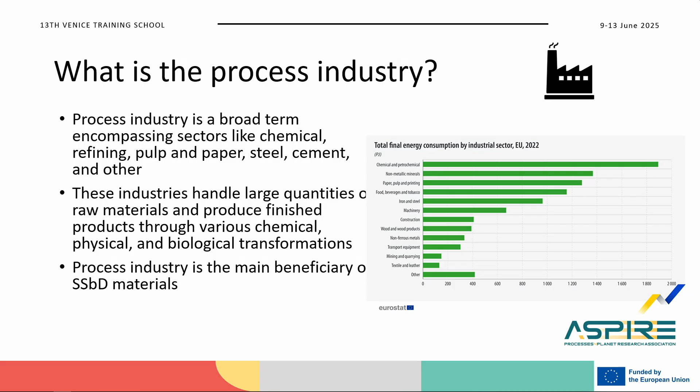Indeed, process industry is by far the greatest consumer of energy and materials in the world. But from the other point of view, it's probably your main customer as material designers. If one day your great substances or materials end up being commercialized, they are going to be the ones that will upscale them and really make money out of it.

So let's talk about safety and sustainability. Remember that SSbD is a framework not only for materials and substances, it's also for products and processes, and it's something where everything can work together. If we have a look at this diagram, we will see that process industry is somehow involved in the area of step number 2, safety in the operational environment, sustainability, and finally the socio-economical assessment.

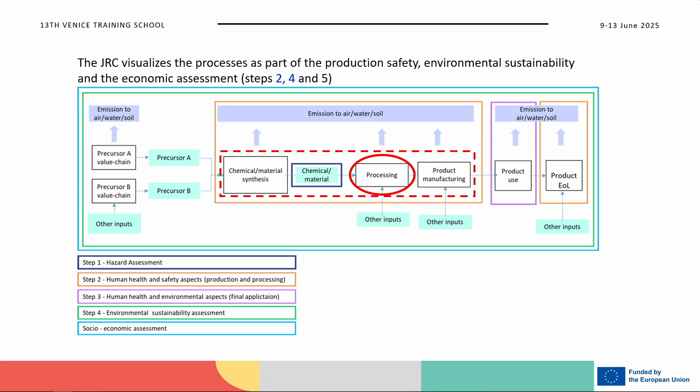Today, I'm going to talk especially about steps number 2 and number 4. So, step number 2, safety. I brought here 4 examples about how process industry can improve the safety of the materials or the substances we want to elaborate without changing their chemical composition. I did it intentionally. So let's start with the first example.

Let's talk about the material format. I'm not sure whether you've ever been working with additive manufacturing, but something you should know is that if you work with aluminum powder as raw material, it's an explosive material. At this point, we could directly start trying to redesign the material looking for non-explosive properties, but it's much easier than that. I told you that aluminum powder is explosive. We can just change the format of the material and work as wire. That's called wire additive manufacturing, and it's not risky at all.

Another example, probably in the same line, is whenever our process needs secondary substances that are not intrinsically part of the material itself, like lubricants or solvents. In those situations, again, it's not about substituting those lubricants or solvents, we should somehow go deeper in the process. I was quite surprised a couple of days ago when we were in that group for lubricants, and Iranzu was the first one who said, do we really need those lubricants or those solvents? That's the right question we should ask ourselves, because sometimes we can drastically modify the process in a way that we don't need them anymore.

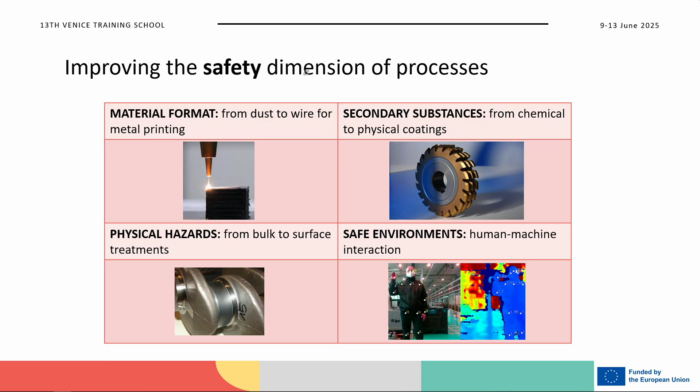And last but not least, there will always be situations where that hazard is very difficult to remove because it's something inherent to the material or the process. Then we can always change the working environment. During the last few years, machine-human interaction has been gaining the attention of research. The idea is to convert sensors or cameras into processing machinery in a way that they can detect the presence of humans in the surrounding area. If the machine considers that someone is very close to the risky area, it will automatically stop.

And that's just about redesigning the processes to be safer. We will for sure need data, and for that purpose, I've got good news: in process industry, we have access to a huge amount of theoretical and real data.

On the one hand, we have very good analytic models like finite elements to simulate how the new processes will behave, how much material they will need, how much energy we will need to input. We can also simulate very well the way that risk propagates in the company—I'm talking about radiation or heat. If we are still working with toxic substances, we still have obviously the QSAR models.

And something I wanted to highlight: process industry usually works with digital twins. This is a huge source of real-time information—I'm talking about material consumption, material flows, energy flows, even people working around the machinery. But that's a dragon. As Irina was saying yesterday, it's quite difficult to get access to that digital twin of the company. So don't be a dragon, share your data.

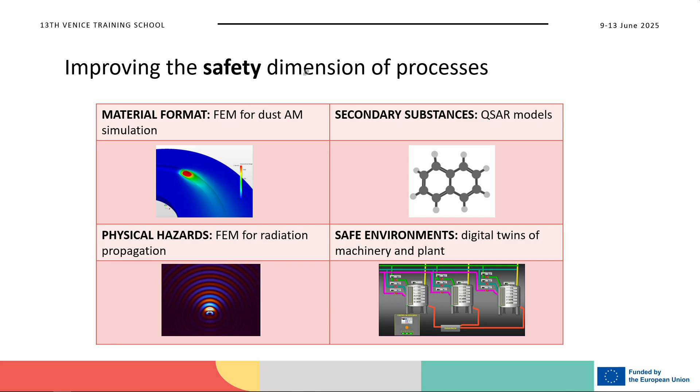Right, let's move to the next step: sustainability in process industry. In the case of processes, the strategy for sustainability is quite clearly defined. There are about 7 or 6 spots where the industry is currently working.

I'm going to start mentioning the first two. They are quite similar: material and energy efficiency. The idea is almost the same—save as much material and as much energy as you can. Currently, the main solution seems to be in the area of digitalization. It's a word I don't really like to use because it's so broad that it can be confusing. But in this case, it's just about monitoring all the material and energy consumption we are having in our company and detecting those areas where we are really wasting energy and material. In many cases, it's just about switching off the machines where they are not being used.

Another trending topic in process safety is to change the main source of energy. We still have a lot of industrial companies nowadays using fossil fuels for their processes—I'm talking generally about thermal processes like casting. I'll be honest, it's quite difficult to convince them to change that because it's somehow the heart of the company. But there are alternatives: there are always green alternatives like green hydrogen, biofuels, or even thinking about whether we can move from burning things to electrifying the process in a way that we can get access to renewable energy.

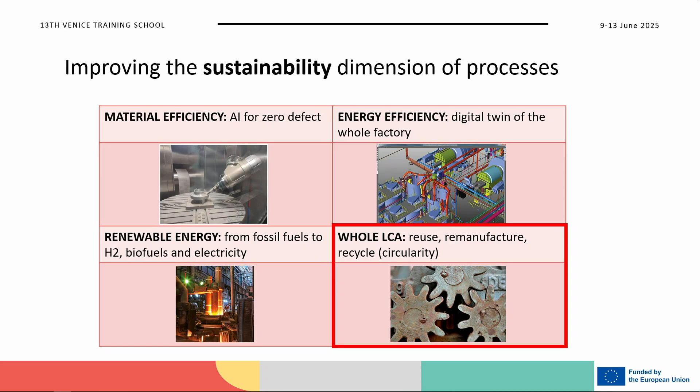And I wanted to stop for a while on this last slide because it's actually the bridge between processing and functionality. I brought this simple example, but I think it's quite significant.

So what's the matter? If we start designing a new material with extremely high durability, we will notice that things are never for free. Hard materials usually need a higher amount of energy during production. And indeed it's even worse: once we produce that hard material, it's going to be quite difficult to manufacture a part out of it, because no one can drill it, no one can bend it. It's a very difficult material to work with.

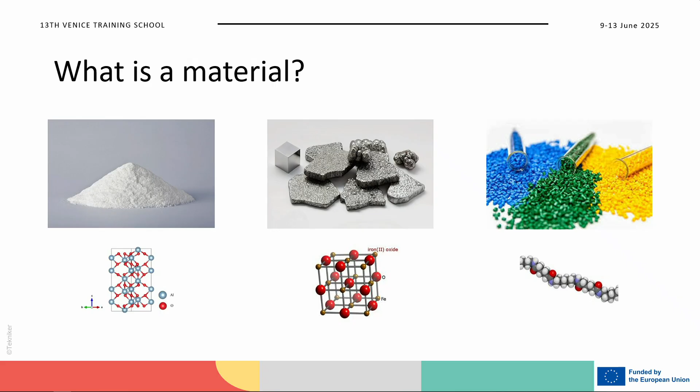So I will start just with the basics. And I know that there will be people that will not agree with this first concept of material. So what is a material? If we talk about an ideal material, we will say that it is a substance made by atoms combined together under a certain structure. So the way that they are combined can give some specific properties.

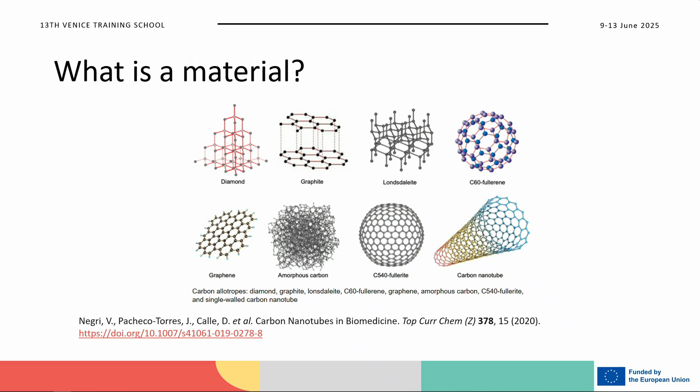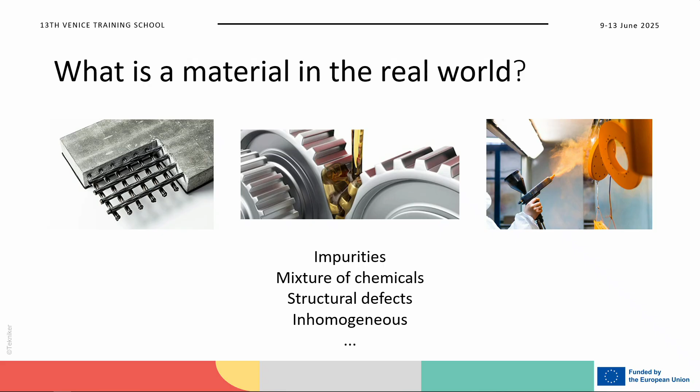Well, this is very good for modeling because it's quite simple to model, but in reality, a material is composed by many other components. So we have a lot of chemicals that are involved. There are structural defects that are not considered in the ideal world. There are parts that are not homogeneous, and a lot of impurities. So, well, let's say that the world sometimes is more complicated.

So we need to have an idea of how to create these materials. We know that there are some characteristics that can help give specific properties. There are some microscopical level parameters that we can play with to give a specific functionality. We can also play with the composition, adding some alloys, for example. This is the case of the metals. Most of the metals are composed by different alloys that are mixed, or additives, like in many chemical products.

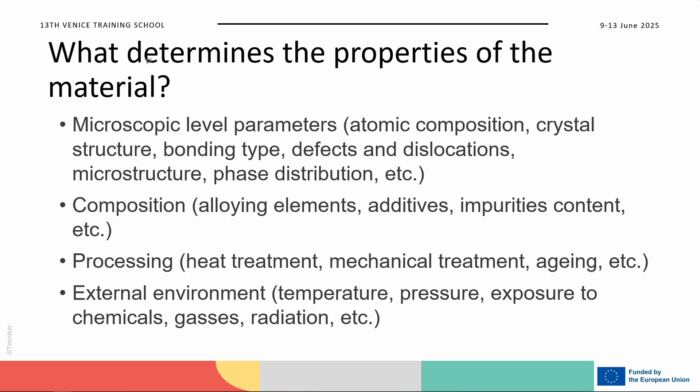We can also confer some properties by processing the materials. So we can harden the materials with heat treatments. We can also use mechanical treatments to confer specific properties. And then there is also the environment that can give defined properties to the material.

So, well, how does this look like when we are talking about functionality? So when we have a material, we have to consider that the functionality of this material is the ability that the material has to behave in a certain way in a specific environment, and for a specific application. So a material can have a lot of properties, but it doesn't mean that this is a function of the material. Because, for example, a jacket can have some specific optical properties, but if I don't need them, it's not part of its functionality.

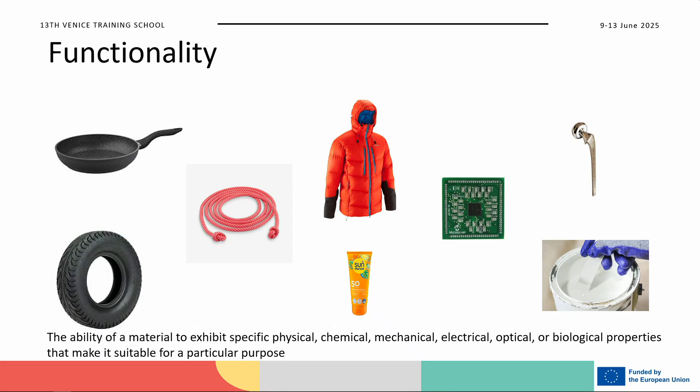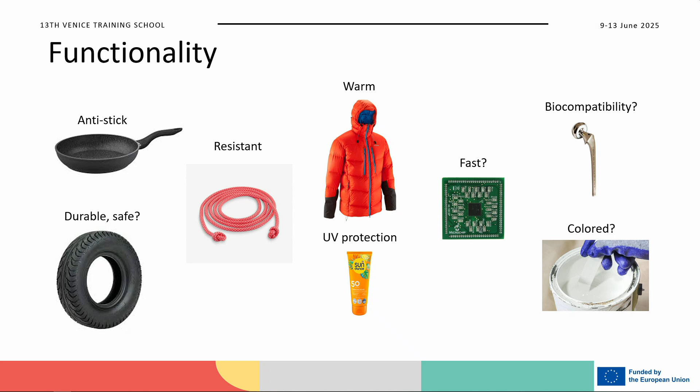So when we see a determined material, we associate to this the properties that we want normally. So, for example, we want that a jacket will be warm, or for a sunscreen to have UV protection. But in general, there are not just the properties that come to our mind immediately; there are other properties that we have to consider, because it's not just one of the properties that makes the material functional, but it's a combination of them.

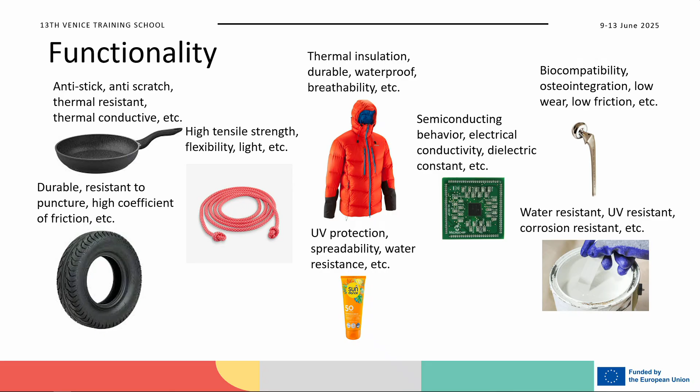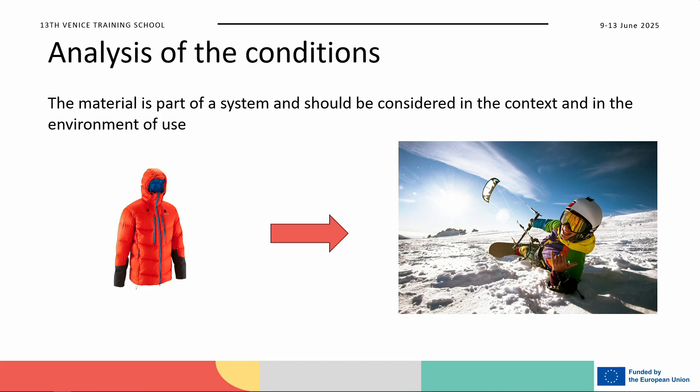So, a very important point is to consider the conditions that we have to test. If we want to characterize a material, we have to put it in a specific context, and we determine conditions, because otherwise we can assess the wrong parameters, and so we are giving a functionality that it doesn't have.

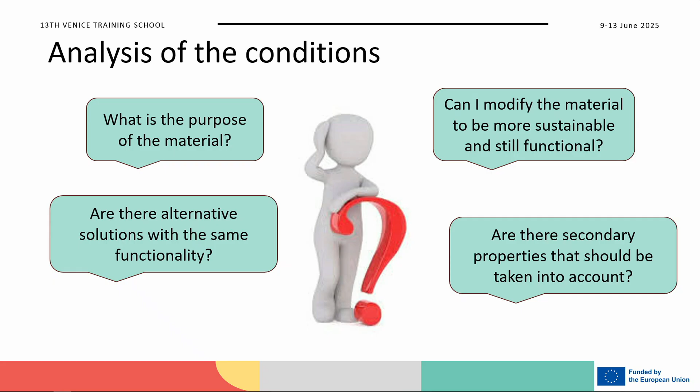Two days ago, we were talking with some of you about the use case of lubricants, and I realized that there were some aspects that I didn't touch in my presentation, so I've added just one part. When we are thinking of a material, we have to think about the purpose that has to be satisfied. Are we able to modify the material itself, or is it better to find a different kind of approach, a different kind of solution? Are we considering all the properties of the material in the right way?

So I went back to the use case that I had proposed. This is the use case of lubricants for the deep drawing process. Some of you didn't know this process, so it's like a punch that presses against a sheet of metal and gives a determined shape to the sheet so that it has a functionality. In this case, it's a basin sink. What we expect from the lubricant in this process is to reduce the friction and to mitigate the wear, specifically because, since metal is sliding against metal, there is a lot of heat produced, and so we need these properties from the lubricant to make the process easier.

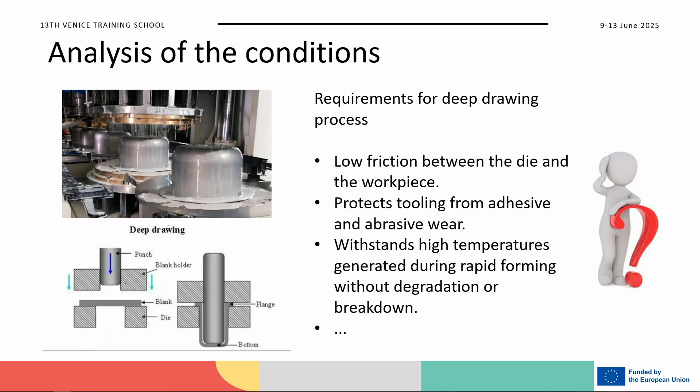Our problem is that at the moment there are chlorinated paraffins, an additive for the lubricants, that are extremely toxic. So we want to substitute them. What is the functionality that they give to the lubricant? They are anti-wear and extreme pressure additives. They reduce the friction, so we can keep this in mind to find a solution for the substitution. They are also quite thermally stable, so these are the properties that we want from the lubricant, because we have to substitute them.

So we can think about the new solution. Should we just exchange the chlorinated paraffins with another additive? Should we make a completely new formulation? Or is it possible to have a new process? For example, a coating. It's a good solution, in many cases it's used. So we could also think about this.

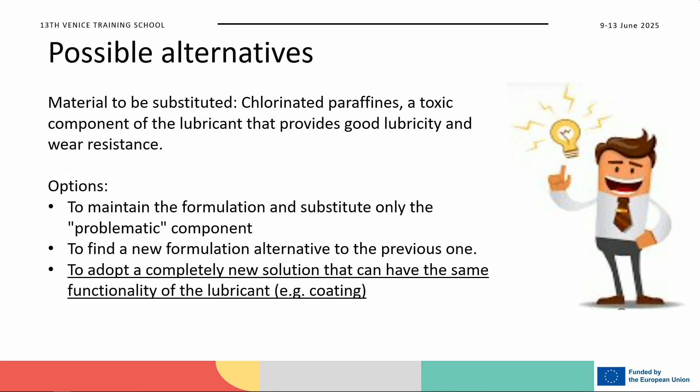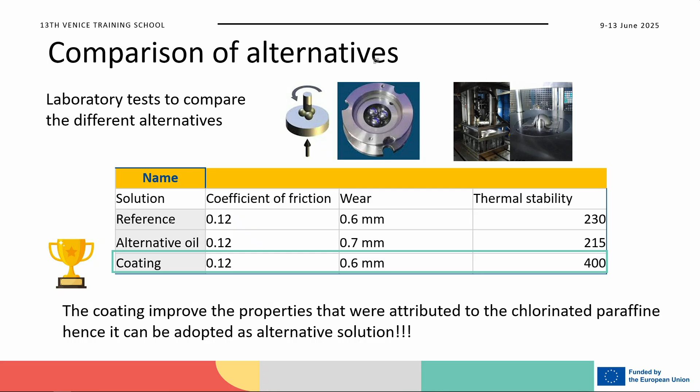We can go to the laboratory and start to test the lubricant and the coatings and see that we have good properties from the side of the coating. It has a good coefficient of friction. The wear is low. It's much more stable from the thermal point of view. So it's a very good solution. We can test with laboratory tests, we scale it up, and it works. But then we go to apply this solution, and it will fail.

Why? Because we haven't considered all the parameters from the side of the lubricant itself, because the lubricant also has to dissipate heat. It's not that it just has to be resistant to heat. It also has to mitigate this heat and remove it from the component. Otherwise, we are accumulating heat inside of the die, and at a certain point, it will generate a failure on the pieces that we are producing, and also a failure of the die itself.

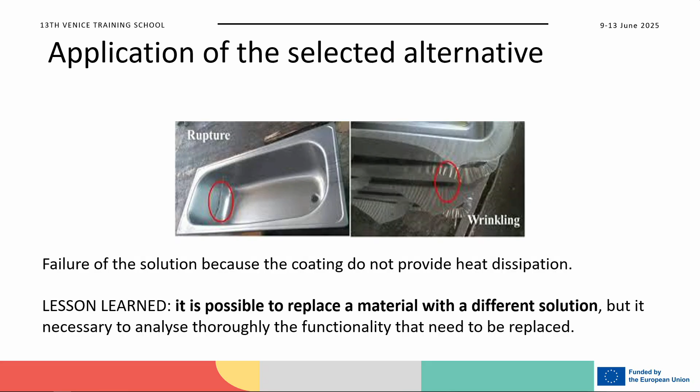So what I wanted to transmit is that even if we are looking for the substitution of a component in a system, maybe we can change the process and adopt completely new solutions, but we have to look at the very big picture, because maybe there are some aspects that we have not considered from the beginning. So a very thorough analysis is needed when we are deciding to change a solution. This was thanks to you that we were discussing this.

Next point, the environment. When we are trying to see the functionality of a material, we have to always consider the environment. It's one of the most important points, because if we start to characterize something but we are not trying to reproduce the real conditions, the material will behave differently. So there are effects of temperature. The chemical environment is important.

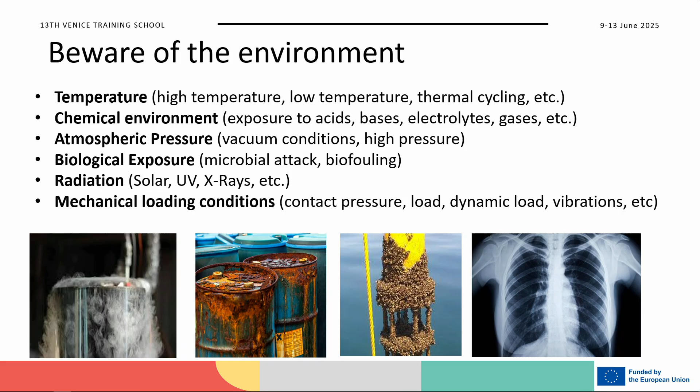Also the atmospheric pressure: if we are working in vacuum or at high pressure, we can have completely different conditions. There is biological exposure that we have to consider. Radiation can affect the materials. And also, for mechanical systems, it's important which are the loading conditions, the working condition itself, the movements that are taking place.

So I have a couple of examples here. Maybe some of you have already worked with hydrogen. It's a very appealing material, because it's a gas that can be produced in a green way, so it's very attractive. But it's very, very dangerous. Of course, the first idea is that the danger comes from the explosion that can be generated. It's a flammable product. But it's not just this. Hydrogen is very dangerous for metals and for other materials.

So here there is a curve from a slow strain rate test, that is, you start to apply tensile stress to the specimen for a long time and wait to see what happens. And you can see that the material, if you see the stainless steel 304, at a certain point with hydrogen it fails, very far from the maximum resistance that it should have. The hydrogen enters inside the metallic structure and that can cause a brittle fracture. So this is very dangerous in some conditions. So we have to think about the environment when we are realizing a test.

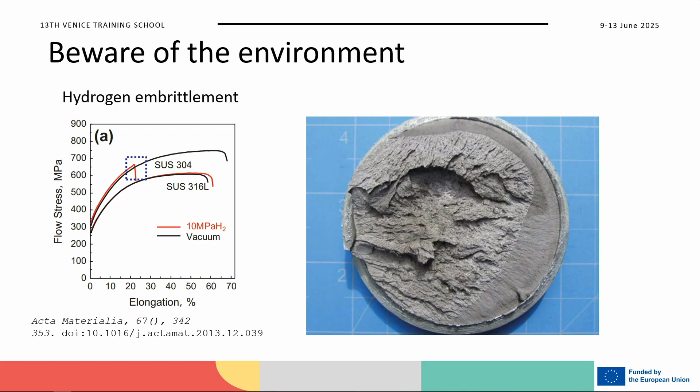There is a second example that I took from a YouTuber, Veritasium. I really suggest you watch his videos, because he's a physicist that explains different stuff. And there is one interesting video about the cold welding that can happen in vacuum conditions. So, well, in vacuum, nothing should happen, no? Well, that's also one of the problems.

Because when you have two metallic surfaces that rub one against the other, normally they immediately create a passive layer. So in this moment, the material becomes passive and does not react. For example, aluminum is very reactive as a metal. So immediately there is a layer of oxide that is very, very thin, but it's there, and it protects the surface. If we are in space, there is no oxygen. So in that case, the metal can weld one against the other and stick together.

So what happened there, it was a space mission, and at a certain point a door was not opening. It was impossible to open the door. And so they found this. Of course, in this case, it was difficult to predict this behavior. But that's why when we think about characterizing a surface or a material, we have to think of conditions that are as close as possible to reality.

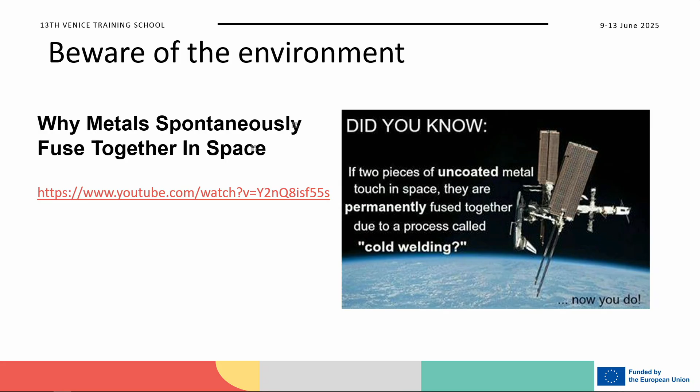So, to go from the characterization test to the functionality, sometimes it's quite difficult. This is what I learned when I was trying to characterize the anti-icing properties of a material. How can you reproduce with a test what happens on the wing of a plane? Normally, you have to try to be as close as possible to reality, but with the means that you have. So in this case, what we do is measure the contact angle that appears between a surface and the water, for example.

Then we start to think about methods to measure how much force I need to remove the ice when it is formed. I can put cameras in a climatic chamber to see the time that is needed for the ice to stick on the surface. There is a lot of work sometimes for functionality. Sometimes it's very easy: I just make a test and have the functionality. Sometimes it's not like this. So we have to think about this, and we have to try to design the right experiment.

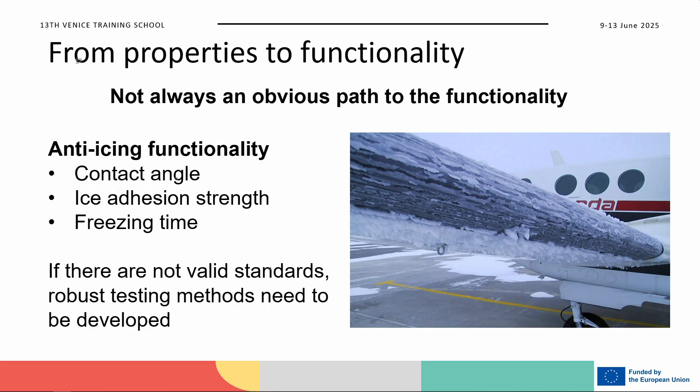I know that this is a point that goes against what we are trying to do with the data. Because for every test that we do, we have a different procedure, a different protocol. It becomes complicated to have data that are harmonized, but we cannot go too far from reality. So there are some tests that can be standardized and can be done always in the same conditions. In some other cases, unfortunately, we cannot do that. So we have to take this into consideration.

So here I'm jumping a little bit to the part of what we want to assess of a material. So there are many properties that the material has, as I said. Some properties are more important, others will be less relevant, maybe optional, others absolutely relevant.

So when we are starting to make the protocols for the characterization of the materials, we have to consider from the beginning what is absolutely relevant, what are the characteristics that have to be there, what are some characteristics that can improve the material, but if they are not there, we can survive with that, and if there are properties that we don't need to care about.

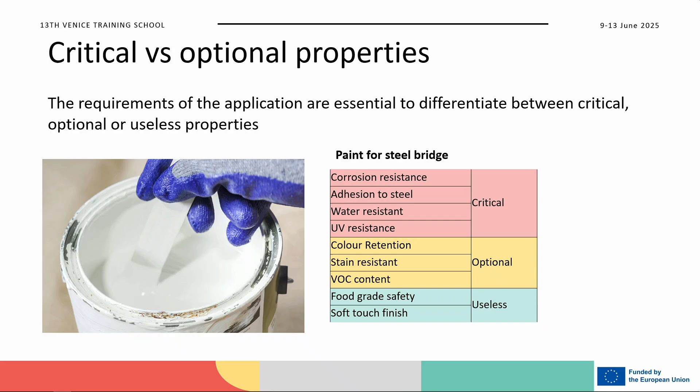Once that we have this, what we have to do is to think about the methods that we have to use. So we have to standardize, if possible. If it's not possible, we have to build a robust protocol for assessing the performance. And assessing the performance means that we have also to establish some values that are acceptable for the material, because especially for the industry, many times we can make tests that are just a comparison between materials.

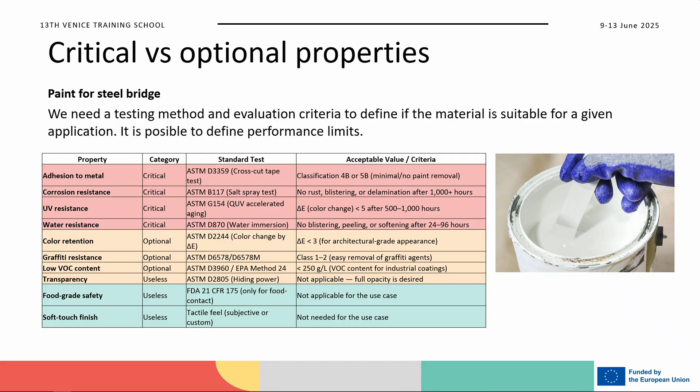At low TRL level, it's something that can be done. But if we go to the industrial level, there are some criteria that have to be established and have to be reached. Otherwise, the product will not be sold. So we have to think about this.

And now maybe I will be attacked by the people that make multi-criteria decision analysis. But we have to establish which are the leading parameters. Because if there are some parameters that are extremely important, they don't have the same weight of the others. Sometimes we can decide just, okay, these are the leading parameters. I will take the solution that has the best performance on this.

In some other cases, maybe we can mediate between the parameters, give more importance to some, less importance to others, and so make a final conclusion that can also be automatized, but with this assumption. But we have to decide. So the industrial partner in a project is very important because he knows the market, he knows what he wants, so he has to participate in this.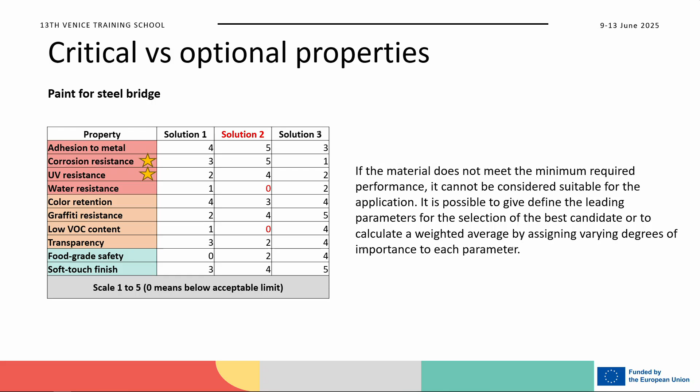So, another jump. Sorry, but it was difficult to see everything without jumping from one side to the other. So, well, we are researchers. We know that there are different kinds of approaches according to the level of development of the material that we have. So I divided it in 3 ranges, but NASA did it in 9. Very complicated, to understand where we are sometimes.

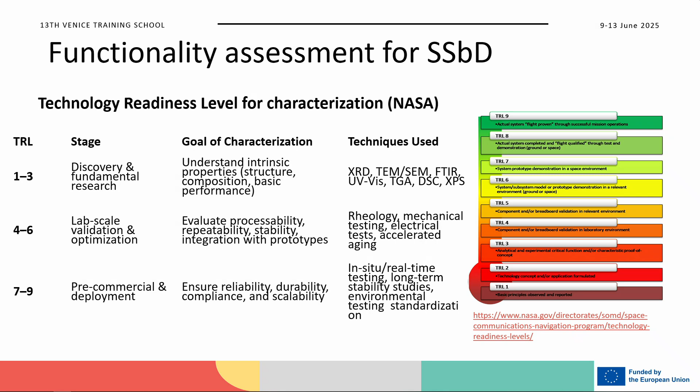But well, it goes from fundamental research, where we have some characterization methods that are very simple, to the high TRL level, where we have a huge kind of system for characterization. So normally for low TRL level, what we are looking for is to understand the structure of the material, its morphology, the chemical composition, and then some basic properties like thermal, mechanical. Here I've already talked about some characterization methods that could be used.

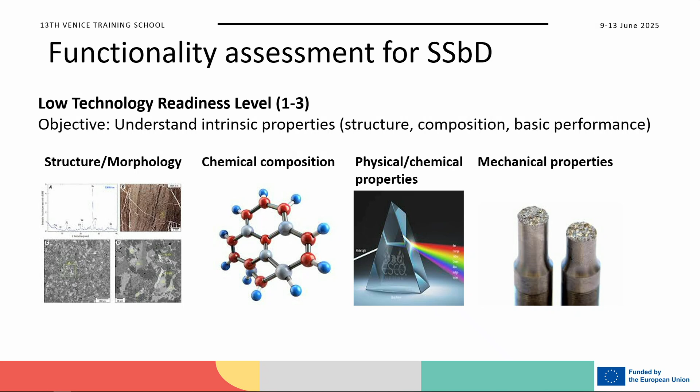So when we go to a little bit higher TRL, the production of the material is a little bit easier because the developers have already started to scale up the system, so we have more material, and we can start to make some more complicated tests. So we can age the material, start to work in conditions that are close to the real conditions, even make some component level tests.

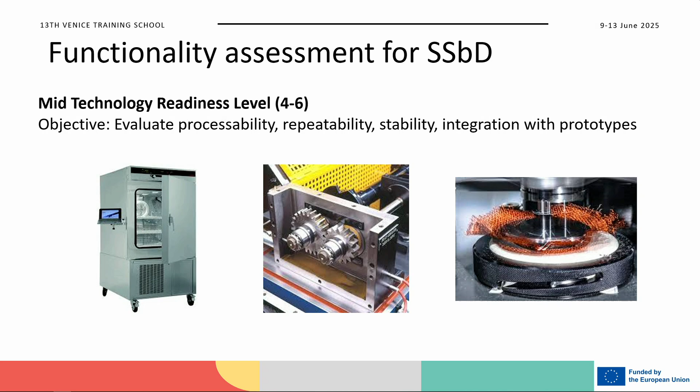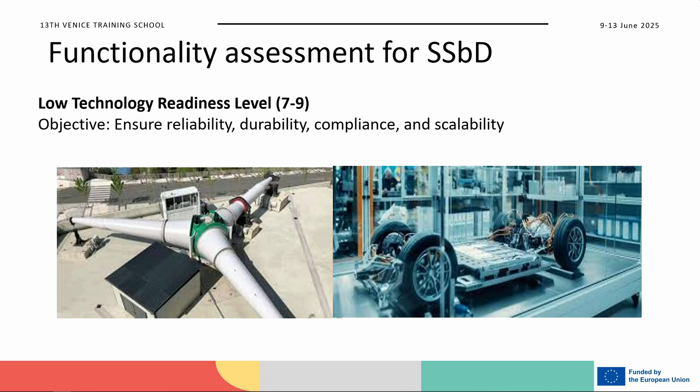So, well, we are talking a lot about characterization, but nowadays we can also assess the functionality with other means. We are lucky that we live in modern ages, and we have also some models that can help us with the characterization.

There are different kinds of models that can follow us with the development at different TRL levels. So we can go from quantum system, quantum computational system, like what we saw yesterday during the training with CHIASMA, that can give us some information about the material in the initial phases. Sometimes it can be even easier than developing the material itself, so we can already get some inputs from the beginning.

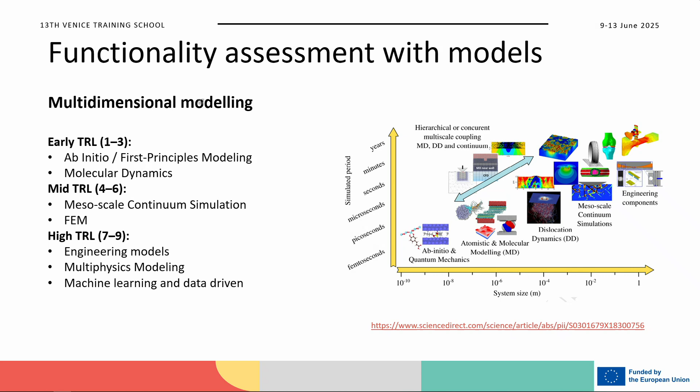And when we go up with scaling up the development, there are other kinds of instruments that can help us. Well, this is like a tool that we have, but it's complementary to the characterization, because each characterization modeling system has to be approached also with characterization, because there are inputs that the model can need in some cases. In other cases, the models need to be validated. So we are talking about something that goes in parallel, that doesn't go separately, but modeling and characterization have always been together, so that we can develop the material in the right way.

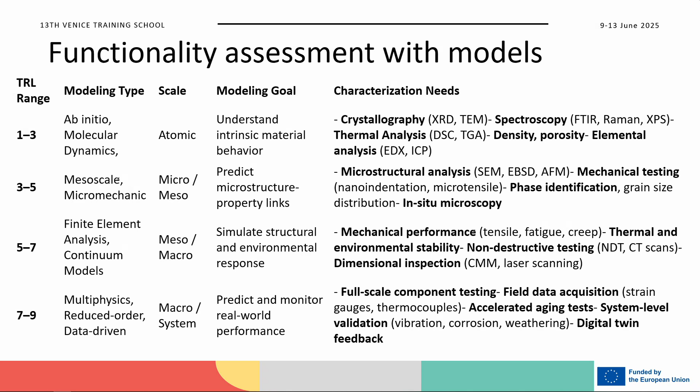So, well, I don't know how I go with the time, but I'm almost done, and I want to talk about what I think is interesting, because the inputs that material characterization can give also to the LCA, for example. I put an example because I think it's easier, and this is an example that is close to my work, so that I know this better than other kinds of characterization methods.

I work in tribology, where we study the friction, the interaction between surfaces, what produces friction, what produces wear, also if there is corrosion, all this stuff. So the lubricant is one of the things that we see a lot.

For example, if we are talking about an offshore wind turbine, it uses a lot of oil. And the oil, as we saw before, has many implications. It is used to reduce the friction, to extend the life of the components. It's also used for cleaning the system, because it's a fluid. There are a lot of uses, but let's focus just on the reduction of friction and the extension of life of the components, because I think that for the LCA it's something that is very useful.

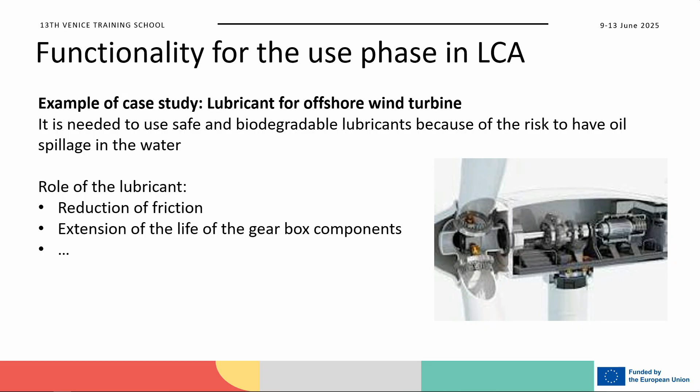So, well, I stole this slide from Mattia Costamagna that presented this. I'm sorry if I did it without permission, but I think that like this we can see exactly in which part we could be useful for the LCA.

So, well, we are reducing friction. Friction means energy, because every time a system is generating friction, this friction is consumption of energy. So we have to take into consideration that if we are comparing different lubricants, it's not just that we see the life of the lubricant and that's it. We have to consider also that there is this reduction of energy consumption being generated. And this data can come from the experiments, it's not something you can have without experiment.

And the same goes for the extended component life. If we have a gearbox, it's made of many gears. For a wind turbine, they are gigantic gears. So if we are prolonging the life of these gears, a component that is in close relationship with the lubricant, we have to take this into consideration. If I have a failure of a wind turbine, the cost is huge because there is a lot of maintenance that I have to do. You can imagine, I have to dismantle this huge gear and have to replace it. The turbine is not producing energy for a long time.

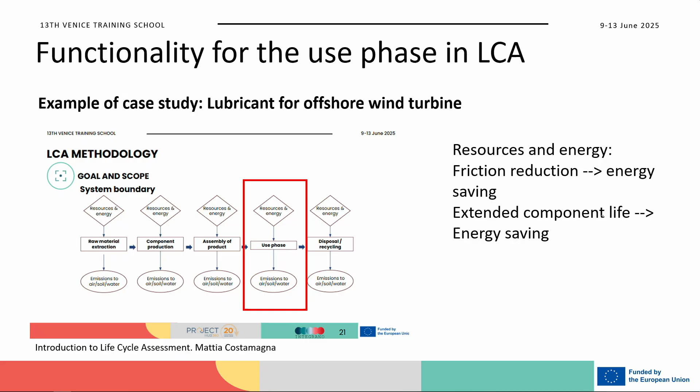So are we taking this into consideration when we make an LCA? Because we should. And this is an example. So can we predict the life duration? Can we predict the friction reduction? Well, I will be sincere, we cannot do it exactly as it is.

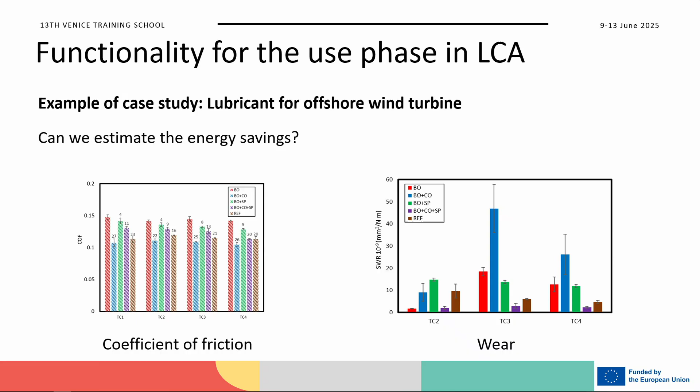Because we can run experiments at low TRL level, maybe that we can go higher. In some cases, we can go even to a very high level, like what we have seen with this system, but it takes time. Anyway, we can make a prediction that has uncertainty, but these are data that I think could anyway be useful when we are assessing a material at low TRL, because otherwise we are absolutely forgetting about some parameters that can be fundamental. I'm almost finished. So, well, in laboratories we have a system for doing this.

Normally what we do is try to scale up the system. So actually we cannot be sure that the friction coefficient in the gearbox of a wind turbine will be what we are assessing.

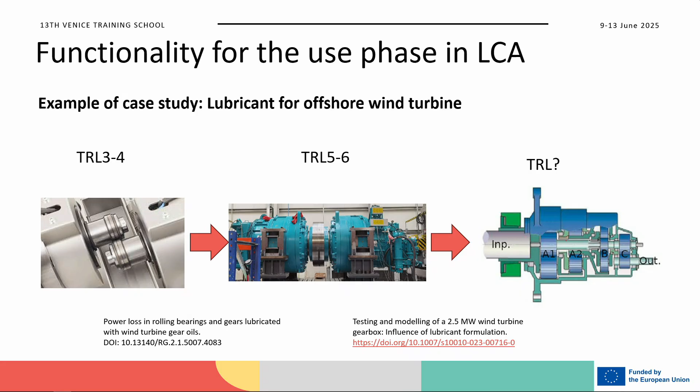But we can make some estimation that can have some errors, but it's better than nothing. So I was talking about this for the lubricants because it's closer to my case, but we have another use case that is the sunscreen.

Also there, we have the same situation because, well, we are assessing the sunscreen, all if they are the same, we make the parameters, we see some parameters for the LCA,

but actually one sunscreen, if I go in the sea, will disappear, so I have to put more. So they are not working in the same way.

So if I'm putting more, also the hazard that I'm assuming is higher because it's increasing the amount that I will absorb. So they cannot be put on the same level because there are some parameters that have to be

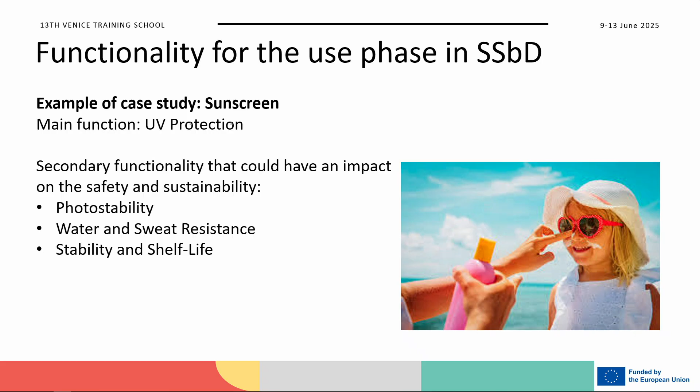considered separately and weighed by the functionality that I'm giving to certain properties. So, I have also the part of textiles, of course, so we have the 3 use cases.

A textile in itself can be more or less sustainable, but we have to see also what is the duration of the textile, and we have to consider also in the life cycle that if a textile will

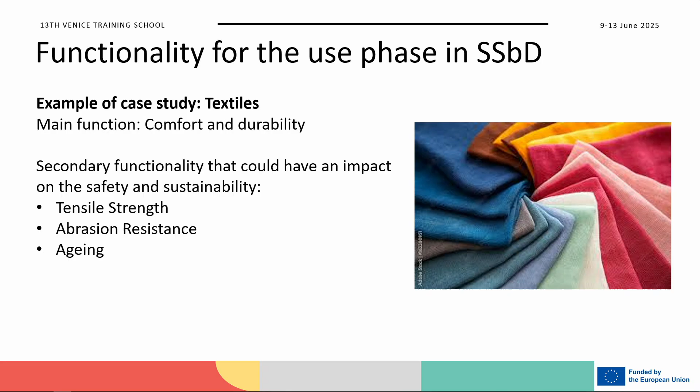last half of the life of the other, they are not on the same scale. So we have to consider all these parameters. Well, thank you.